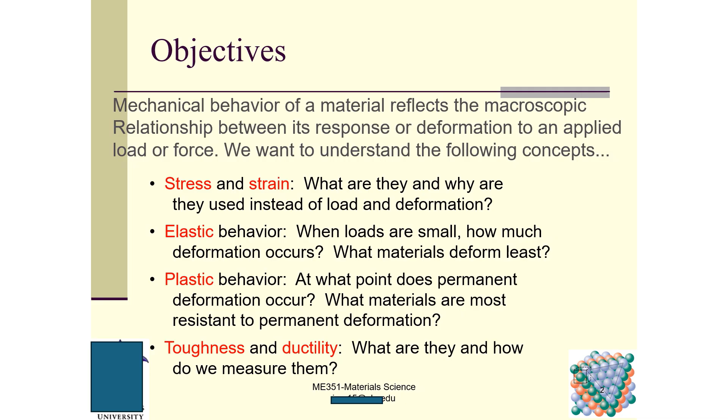So first we talk about elastic deformation. At the very beginning, here is a specimen. Initially we have this kind of atom arrangement, and with a small load, small stretch.

Suppose we have a tensile loading F. We stretch it. You can see the space between these rows, different rows, becomes larger. So this is a bond stretch - among these atoms there is a bond, and you can see the bond stretches.

And if you remove the load F, the specimen recovers its original size and original shape, and returns to the initial state.

Graphically we can use this diagram to show it. Here is delta, this is F. If you have F, you will have delta - loading condition is the cause, and F-delta is the result.

So if you have F, you have one delta, the displacement delta, and then after you remove this F, the deformation recovers, so the shape and size recover, and you get back the initial shape and size. This is called elastic. Elastic means reversible - if you remove the load after the deformation, the deformed specimen will recover its original shape and size. This is reversible.

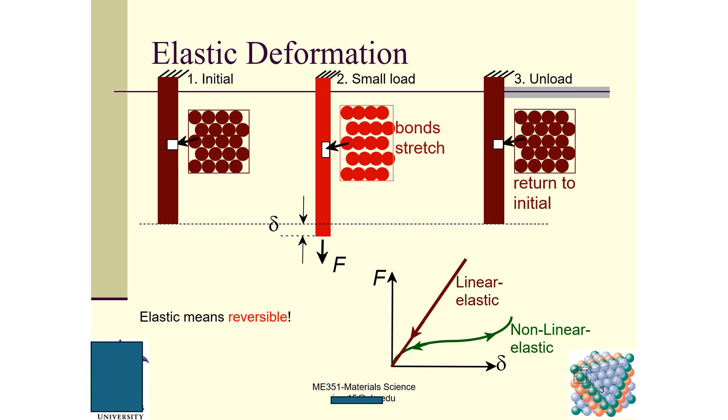Any questions so far? No question. Now we talk about plastic deformation, which is contrary to elastic deformation.

Initially we have this atomic arrangement, and with a small load, the bond stretch causes the planes to shear. This plane shear will generate plastic deformation, while bond stretch results in elastic deformation.

And then after we remove the load, the specimen comes back, but not fully. It can come partway back - here is the original length, but here is the final length. So this will be the plastic deformation.

If we compare this slide with the previous slide, we know that plastic deformation cannot be recovered. Plastic means permanent. Using this diagram to illustrate, you can see F versus delta, linear elastic goes here at the very beginning, and then there's hardening here, this curve.

At this point, you remove the load. After you remove the load, the specimen will go along this part. The slope of this straight line and the slope of that straight line are the same, right? They are the same, but we will not call it Young's modulus here, we will just say the slopes are the same.

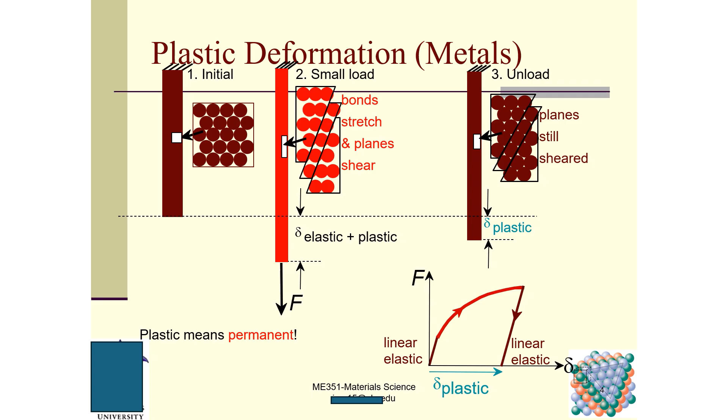Now we talk about a very important concept, engineering stress. This is an infinitesimally small cube. If we have FT here, and we know the area of this cross-section, we can define sigma as FT divided by A0.

This has the unit of pound force per square inch, or Newton per square meter. This is the English unit, and this is the international unit.

Keep in mind, this engineering stress uses A0, the original area before loading. I emphasize this because as we extend the specimen, the instantaneous cross-sectional area A keeps decreasing, and that will result in another stress concept called true stress, which we will talk about later. So A0 is the original area. This defines engineering stress, the normal stress sigma.

We can also have shear stress, using the same infinitesimally small cube, with cross-sectional area A0. If we have Fs, the shear force, dividing this shear force by A0 results in the shear stress tau. Sigma and tau have the same unit, either the English unit or the international unit.

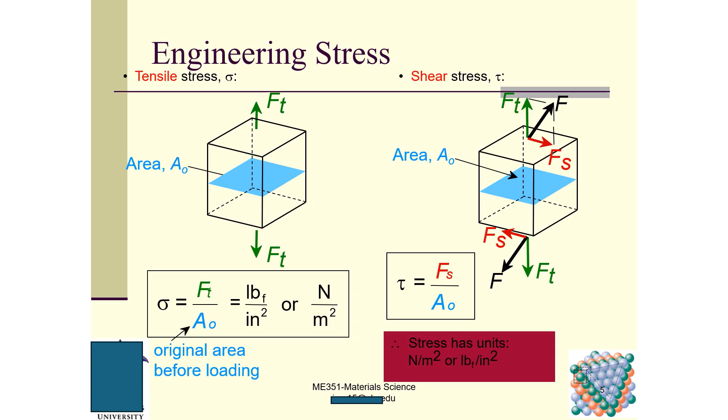Questions so far? No questions? Then we talk about the common states of stress.

Here is a ski lift, an example of simple tension in the cable. We have F at this end, and F at the left end. A0 is the cross-sectional area, and sigma equals F divided by A0. You can see we get stress based on force.

So this is tension. Torsional is a form of shear, for example this drive shaft. When this is rotating, the drive shaft experiences torsion. Here is the torsional moment M, and the diameter equals 2r, where r is the radius.

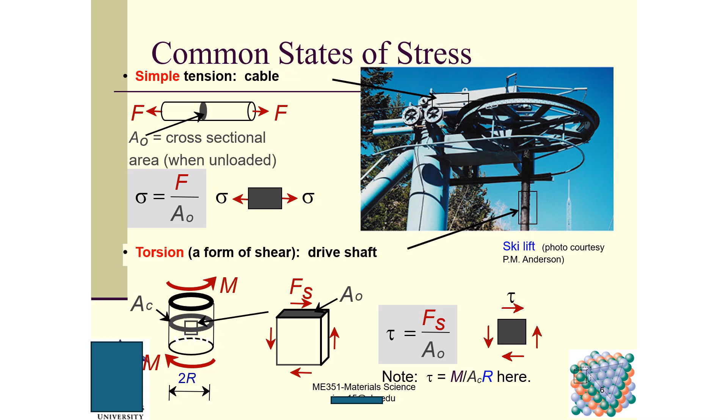This is AC here, and we have Fs shear force over A0, so tau is defined as Fs divided by A0. This tau is a shear stress. Sigma denotes the normal stress, which is perpendicular to the cross-sectional area, and tau denotes the shear stress, which is parallel to the cross-sectional area. You should be very clear about these two concepts.

Another common stress state: simple compression, like a boulder on top. Here A0 is the compression area, sigma equals F divided by A0. For this bridge, this supporting beam, we also have a loading condition of compressive loading. F divided by the cross-sectional area gives us compressive stress. Keep in mind, compressive stress is less than 0.

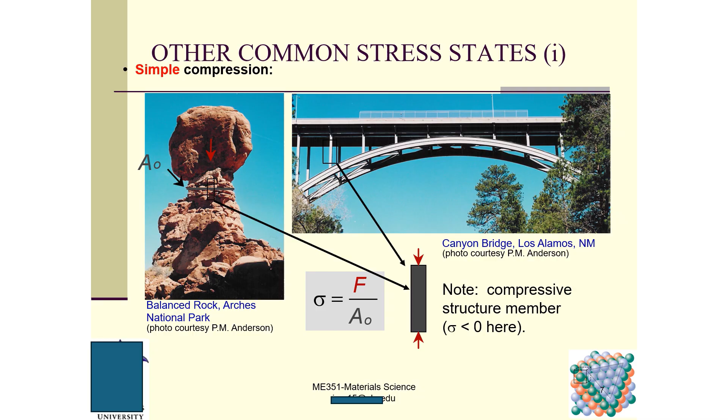And other common stress states. Here is a biaxial tension, which pressurizes the tank. We can see this is an infinitesimally small cube. We have this sigma along the theta direction, this along the z direction. So this is a biaxial tension. For example, this fish is swimming in the pond.

So this guy experiences the hydrostatic compression. Do you know what is hydrostatic stress? Hydrostatic stress is under the water, and all these stresses from different directions remain the same for this given generic point.

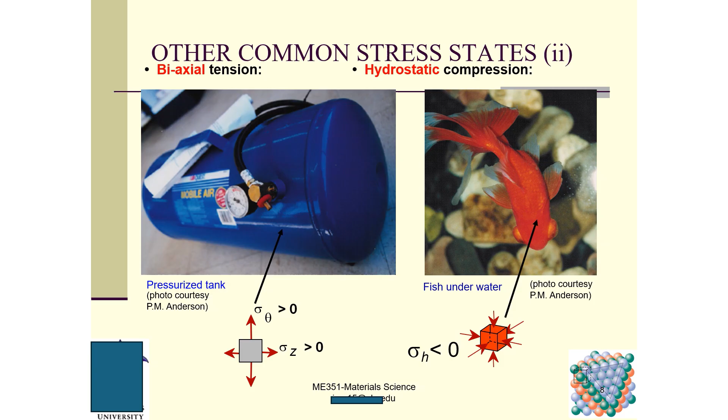Then we talk about engineering strain. This is another important concept in mechanics and in mechanical engineering discipline. Tensile strain equals the displacement divided by the original length. The shear strain is the shear angle gamma, and gamma equals this one plus this one. So this is gamma. We can write gamma using delta x divided by y. This equals tangent theta, if the theta value is very, very small.

Be very, very careful. I'm going to teach the computer-aided engineering course. In that course I will give you the detailed derivation of these strain components. But here, for material science, we focus on material properties based on the atomic arrangements of this material, so we will not focus on how we derive this shear strain and this tensile strain. If you want detailed information about these concepts, you can take another course, computer-aided engineering, in which I focus on the mechanics of elasticity. That will be a very useful course as well.

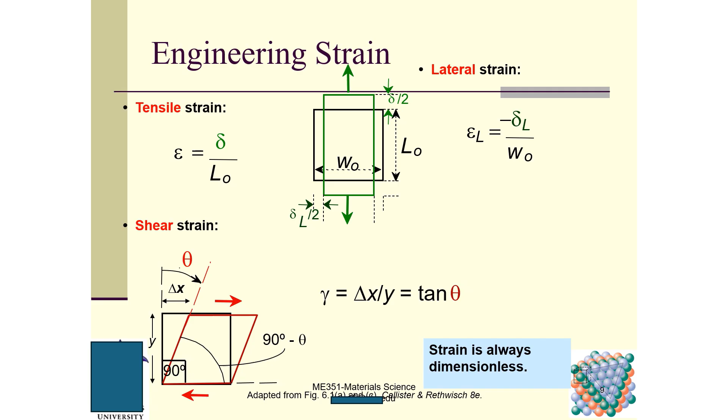One thing you need to keep in mind is that strain is always dimensionless. Strain does not have dimension, does not have unit. Tensile strain, shear strain, and lateral strain. Then we talk about the stress strain testing.

If you have taken mechanics of solids lab, you might have already finished the stress strain testing for 3 materials: cast iron, steel, along with aluminum. As you can see, for 3 different metals and how they break differently.

So here is a stress strain tensile machine. Here is the extensometer to measure the elongation of the specimen. This is the moving crosshead, and this load cell is used to calculate the force applied on the specimen. This is a typical tensile specimen. This end and this end are used for gripping purposes using the machine.

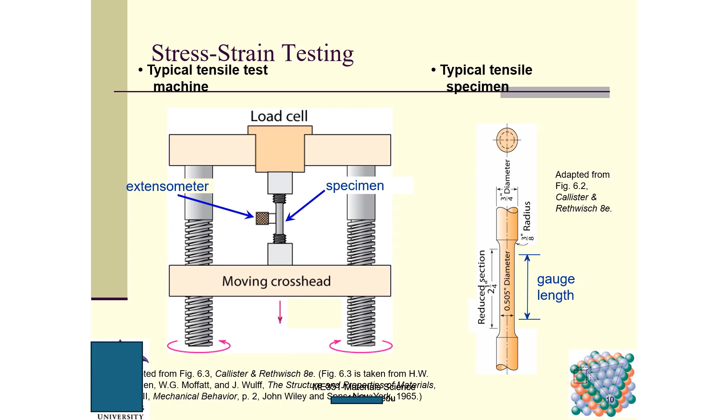Here's the gauge length, and we are going to measure the original length of this gauge length, and also use this extensometer to measure the elongation of this gauge length as the loading condition, as the load increases.

Then we talk about linear elastic properties. Modulus of elasticity, Young's modulus, and Hooke's law. This is sigma and E. The relationship of sigma and epsilon for linear elastic material can be written using this equation: sigma equals E times epsilon. This is the one-dimensional Hooke's law, which relates the stress to the strain, establishing the relationship between the stress and the strain.

This is a simple tensile test. So this is a square, this one is the original shape, and this one is the final shape. You can see if this specimen elongates in the vertical direction, in the horizontal direction this guy shrinks. So this you should need to know that.

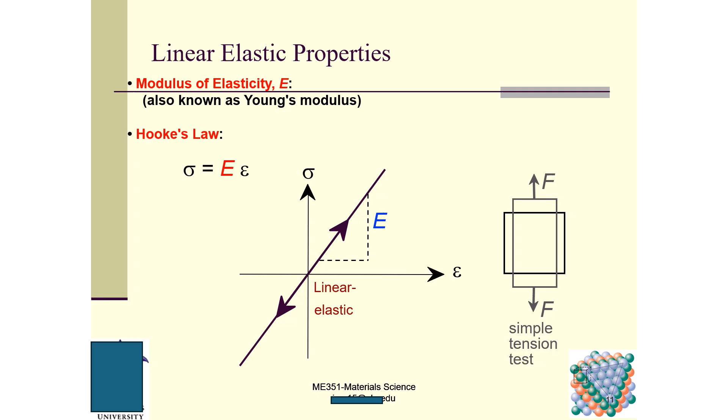So Poisson's ratio. This is Poisson's ratio, nu, defined as epsilon L divided by epsilon. So you have 2 directions, one is longitudinal, one is transverse.

So why do we put a minus sign here? Because based on the configuration I just introduced, if in one direction there's a tensile stress, the tensile loading, in one direction it elongates, and in another direction this specimen shrinks. So that's the reason we have a negative sign here.

For commonly used materials, metals, nu is about 0.33, ceramics about 1/4, polymers about 0.40. And units, nu is dimensionless. You should know that, because nu is a ratio of longitudinal strain and transverse strain. Young's modulus is in gigapascal or psi. Usually we use KSI.

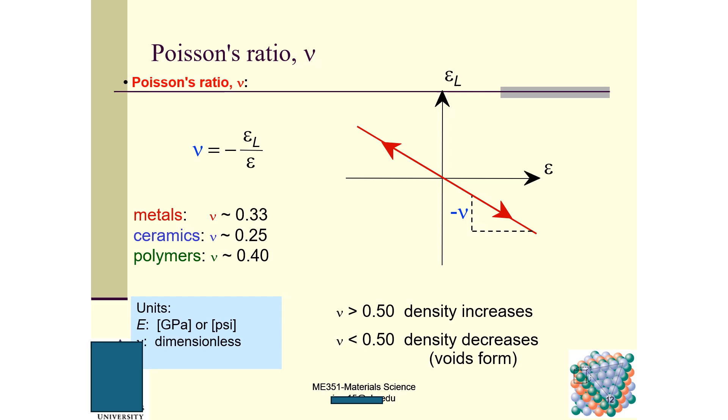You can see when nu is greater than 0.5, the density increases. When nu is less than 0.5, density decreases and voids form. This is for some special materials.

Then we talk about the mechanical properties. The slope of the stress-strain plot. Slope. This is the force. So this is a separation. Right? So this is weakly bonded. So this is strongly bonded. It depends on the bond strength of the metal. You can see this one has very high dF/dr, right? Very high. This one is lower because this has weaker bond strength.

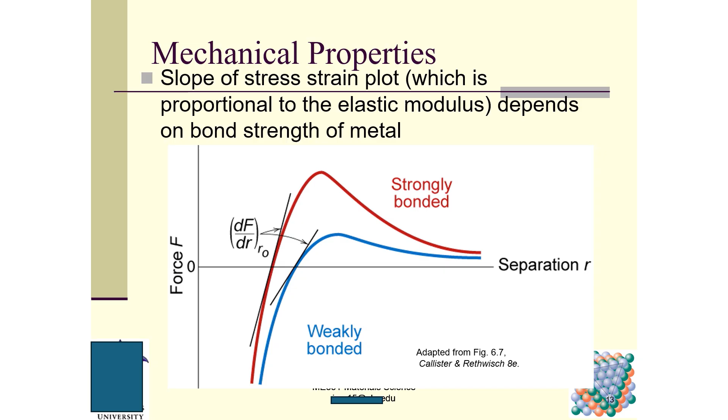Other elastic properties. The elastic shear modulus G relates the shear strain to the shear stress. Elastic bulk modulus K is related to volume. You can see here, okay, you have a pressure P, all in the same direction. If you compress it, the pressure changes the volume, and so P equals negative K multiplied by delta V, the change of the volume, divided by the original volume V0.

And there is a negative sign here also because of the pressure. Okay, so if the pressure is positive and delta V, this is the pressure here, this is delta V here, delta V over V0.

So, special relations for isotropic materials. Isotropic material means that for any given point, the mechanical properties are identical in all directions. So this is called an isotropic material. G and E are related using this equation. And the bulk modulus K and E are related using this equation.

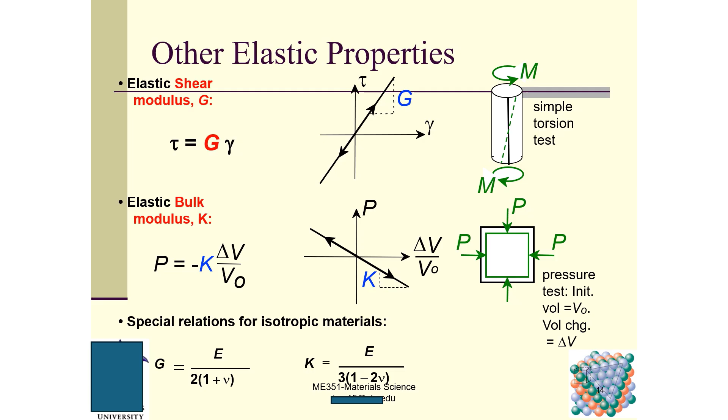Then we take a look at the comparison of Young's modulus for commonly used materials. This is in gigapascals. Okay, giga is very high. G means 10 to the power 9. Usually you can see metals and alloys have very high Young's modulus. Graphite, ceramics, and semiconductors have a wider range because graphite has a relatively low Young's modulus. However, diamond usually has a very high Young's modulus. Polymers are usually very low because polymers are very easy to deform. Composites and fibers have a very wide range because the mechanical properties of composites are dependent upon what the basic materials are and how they are combined together.

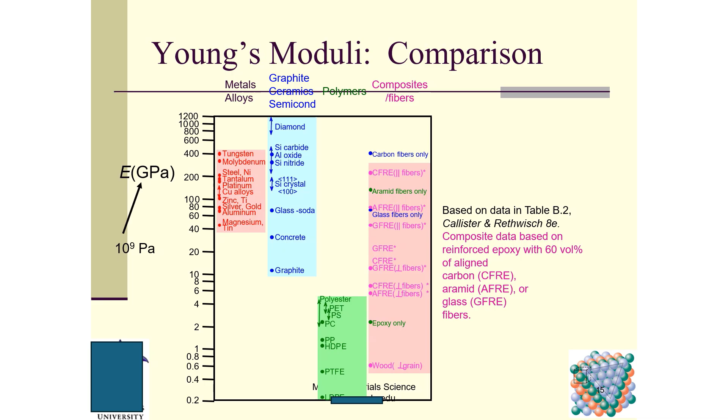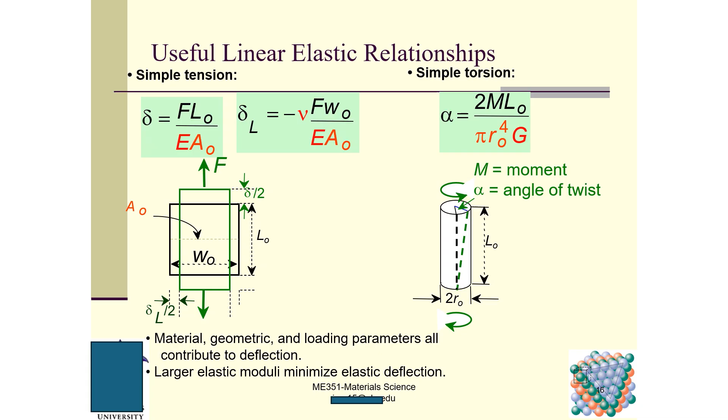Material, geometric, and loading parameters all contribute to deflection. A large elastic modulus minimizes elastic deflection. And we know that, right? A large Young's modulus means that it is difficult to bend, difficult to elongate or shrink.

And then we look at plastic deformation. You can see a simple tensile test. Engineering stress sigma, and engineering strain epsilon. We go this way, loading, and before yielding we can come back and recover the original shape and size. However, at this point, if we keep applying the load, increase the load, and we go here, then remove the load, the material will not recover along this original path. Instead, it will go along this new path. The slope of this straight line and the slope of this straight line are the same. So be very careful.

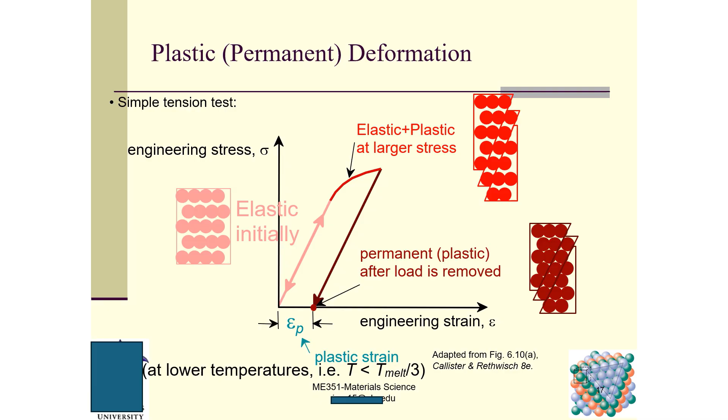The yield strength means that if the stress is bigger than the yield strength, the material is going to have plastic deformation. Look here: yield strength, yield tensile strength, yield strength, then engineering strain. Yield strength is a materials property.

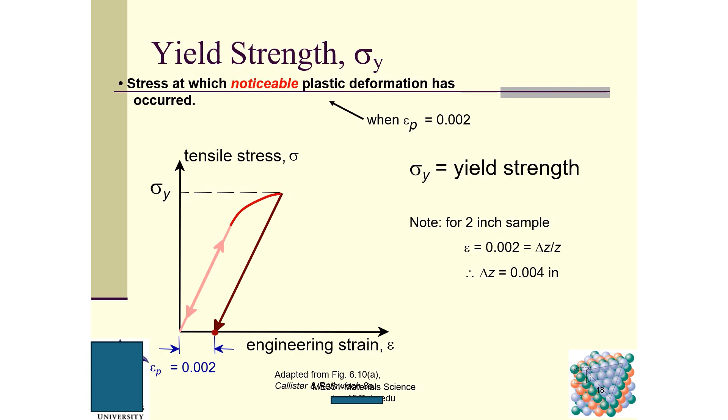Yield strength differs for different materials. We can see metal has a very wide range. Some materials are very easy to yield, some are very difficult to yield. It's also hard to measure for ceramics and semiconductors. Polymer is low. Composite is also hard to measure.

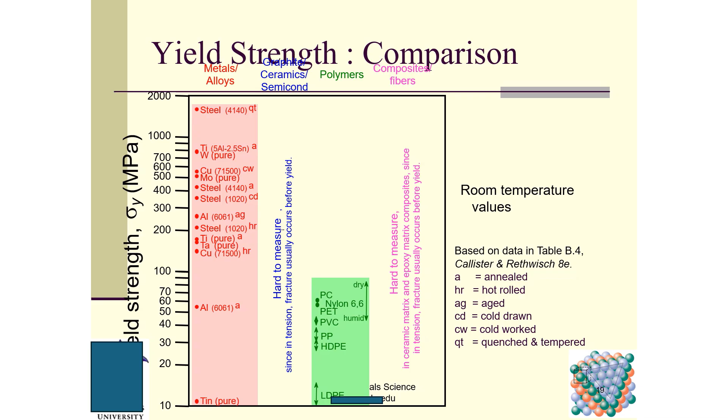Then we see VMSE. This tool is very useful. As I said, if you've bought the book and have access to this resource, using VMSE you can see the animation of how this specimen separates, how it breaks, and how you get this curve.

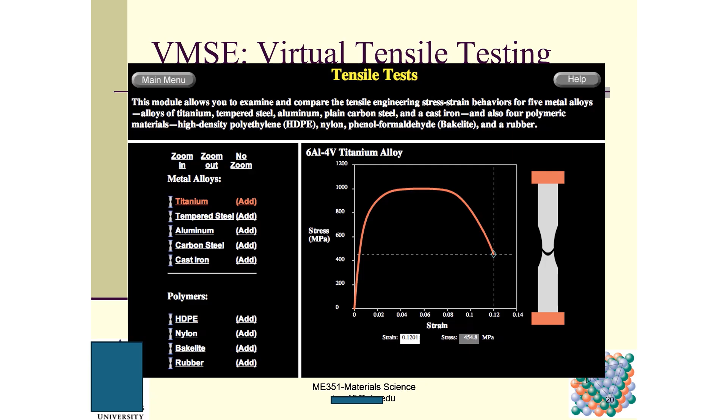Then we talk about tensile strength. There are two very similar words: one is stress, S-T-R-E-S-S, another is strength, S-T-R-E-N-G-T-H. Strength is the material parameter. Stress is the response of material, the stress level. You need to be very careful.

So this is a tensile testing curve. Engineering stress goes from 0 to here, the straight line, then to the tensile strength, which is the highest point. Sometimes we also call this ultimate strength. This is the highest point, then there is necking and then the break. For metals this occurs when noticeable necking starts. For polymers this occurs when the polymer backbone chains are aligned and about to break. So here is fracture or ultimate strength.

Ultimate strength, the fracture strength, is here, and usually people use this one as ultimate strength, but some authors use different terms, so be very careful. Some people use this highest point as ultimate strength.

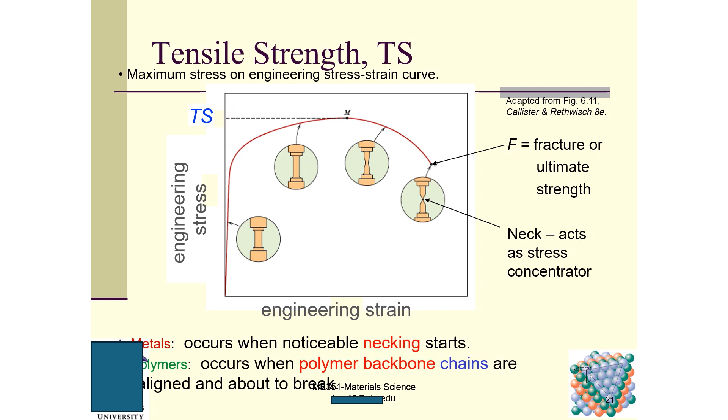Then we talk about tensile strength comparison for metals, alloys, ceramics, polymers, and composites. Composites have a very huge, wide range because, as I said, composites are very complicated, and their properties depend on what materials you are using and how they are arranged and combined together.

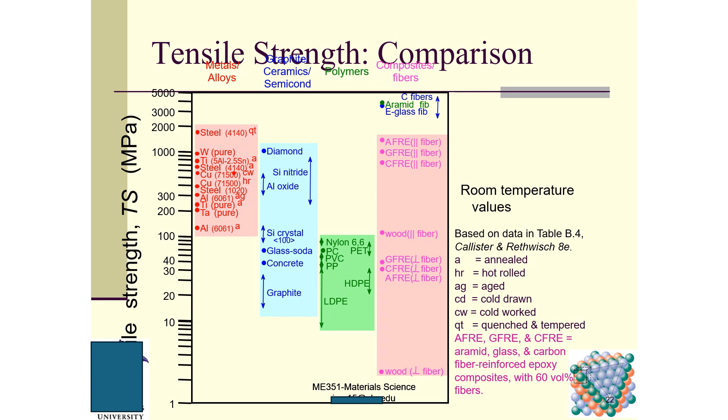Ductility: plastic strength, strain, and failure - the plastic tensile strain at failure. Here, engineering tensile stress is the ordinate, engineering tensile strain is the abscissa. This is L0, the original length, and LF is the length at which it breaks. Ductility can be quantified using this equation: LF minus L0, divided by L0, multiplied by 100.

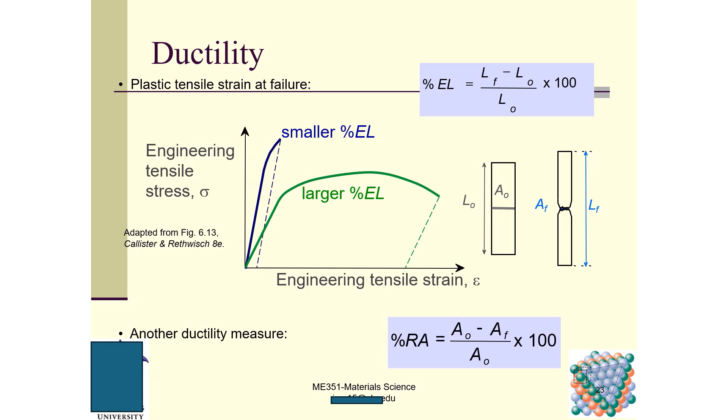Another ductility measurement uses the change of cross-sectional area: the original cross-sectional area A0 and the final fracture cross-sectional area, with the difference between these two divided by A0, then multiplied by 100. This is another way to quantify ductility.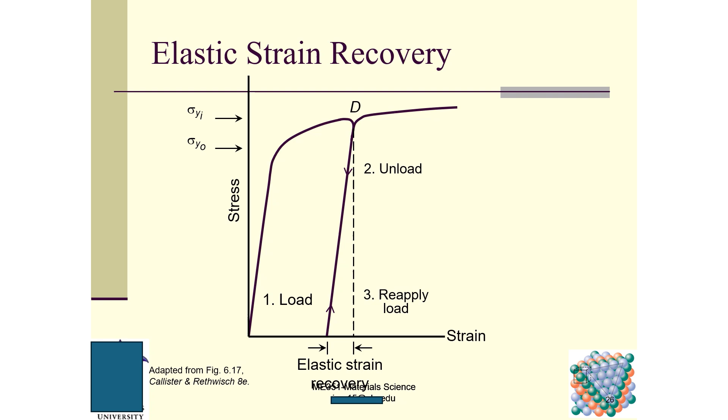And then we talk about hardness. Hardness is used to measure how difficult it is to indent the material. There are several different hardness measurement systems.

One is called Rockwell. In our mechanical engineering lab, I teach students how to do hardness testing using the Rockwell hardness tester. We have 3 scales, and we use HRC. If you have taken mechanical engineering lab, you might have heard of HRC. HRC means H is hardness, R is Rockwell, and C is the C scale. C scale means the major load is 150 kilograms.

So for A scale, we use a diamond. For B scale, we use a 1/16 inch ball, and for C we use a diamond. But here is the major load.

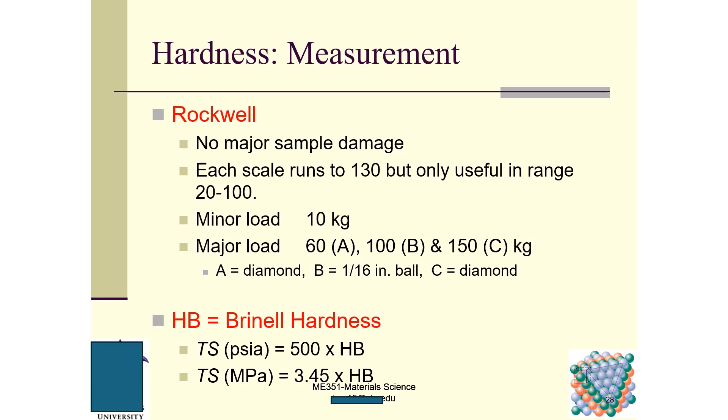HB is the second commonly used hardness measurement system, called Brinell hardness. Brinell hardness relates to tensile strength - tensile PSI, tensile strength MPa, MPascal. This is the international unit, and this is the international English unit. We have an approximate relationship between TS and HB. For this unit system we have 500 as a factor, and for the international unit system we have 3.45 as a factor.

The baseline is that we have 4 different hardness measurement systems: Rockwell, Brinell, Vickers, and the fourth one is Knoop. So the third one and fourth one are used for micro hardness. Any questions?

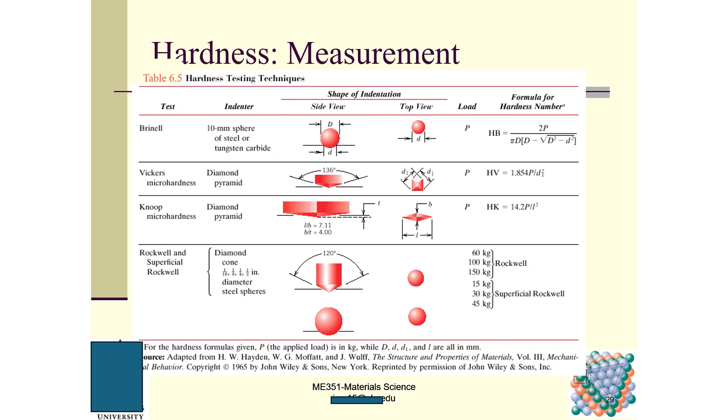No question? So, hardness observations. Hardness is a measure of a material's resistance to localized plastic deformation. We have an indenter here - we just apply the indenter to see how easy it is, and to measure the resistance.

So the 2 most commonly used hardness testing techniques are Rockwell and Brinell. Several scales are available for the Rockwell test - A, B, C. If you are going to take a mechanical engineering lab, you will learn how to use this hardness testing machine. For the Brinell test, there is a single scale.

One thing I want to mention is that we also often hear about pencils having different HB numbers - that is Brinell hardness, right?

Brinell hardness is determined from indentation size. The Rockwell test is based on the difference in indentation depth from the imposition of minor and major loads. So these two hardness measuring systems are performed based on different principles.

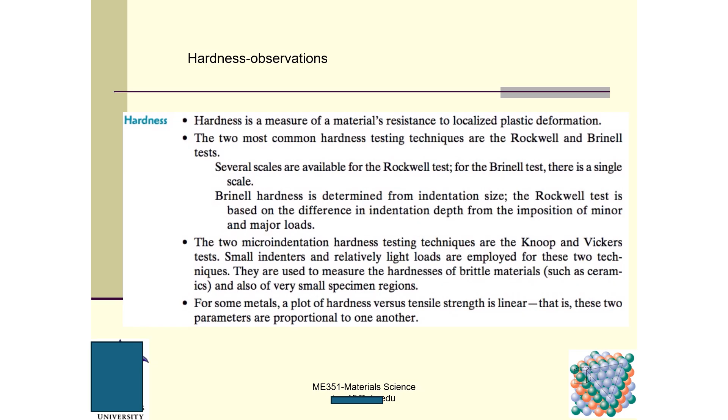The true stress and the strain. We talk about engineering stress and engineering strain, and then we talk about the true stress and true strain, and how they are different from their engineering counterparts.

True stress equals F divided by Ai, where Ai is the instantaneous cross-sectional area of the specimen, because when you do the tensile test, the specimen's cross-sectional area is changing, it's decreasing. So here it's called true stress, and true stress keeps increasing.

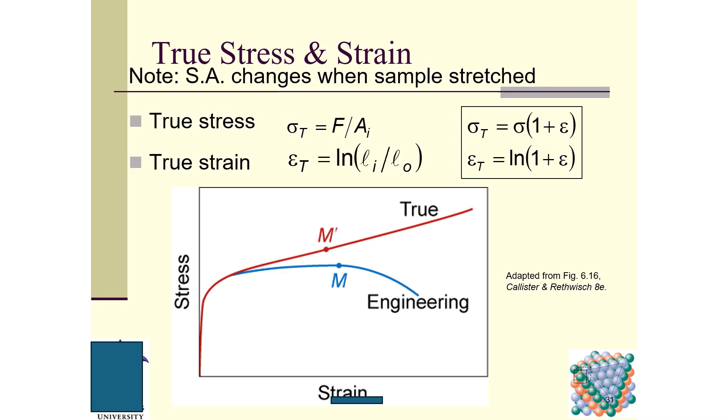The true strain is the log of the ratio between Li, the instantaneous length of the specimen, divided by the original length L0. True stress and true strain can be related to engineering stress and engineering strain using these two equations.

Hardening is the increase in yield strength due to plastic deformation. Here is one material with large deformation. Here is a small hardening, and here is a large hardening. And curve fit to the stress strain.

This is the response: sigma t, the true stress, equals k times epsilon t to the n, where n is the hardening exponent. n equals 0.15 for some steels, while n equals 0.5 for some coppers. This is the true strain.

This equation is very, very similar to the equation for creep testing, right? But that one is for the increment of sigma over the increment of epsilon, while here it's just sigma and epsilon.

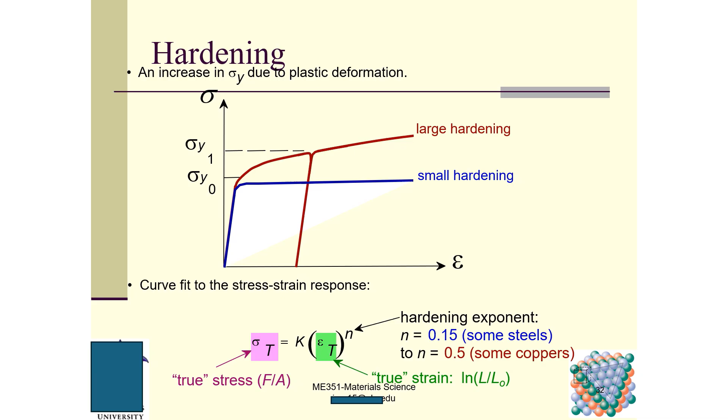Variability in material parameter properties. We know that for the same set, the same bunch of the same purchase of materials, even though they have nominally the same mechanical properties, when we measure their mechanical properties, they are actually different from one another.

Elastic modulus is a material property. Critical properties depend largely on sample flaws, defects, etc. There's large sample to sample variability, so we use a statistical tool to quantify the mechanical properties.

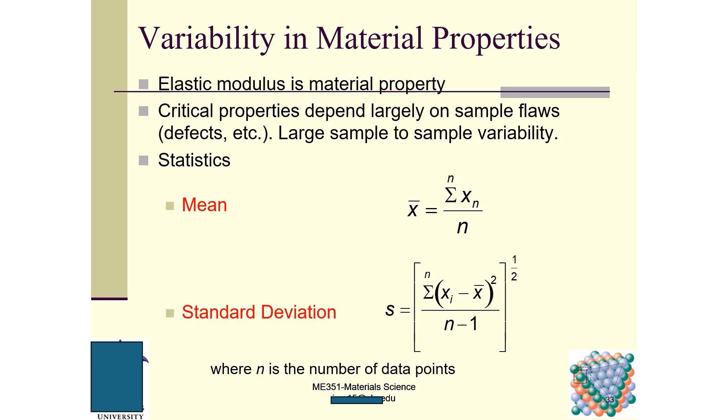First, mean value, okay? Then standard deviation. We will know the mean value and standard deviation.

Then we talk about design safety factor. We have heard this one before. So here is the design safety factor: sigma working equals sigma y, the yield strength, divided by n. We use a safety factor that needs to be greater than 1. That's why we call it a safety factor, because we do not want n to be 1.

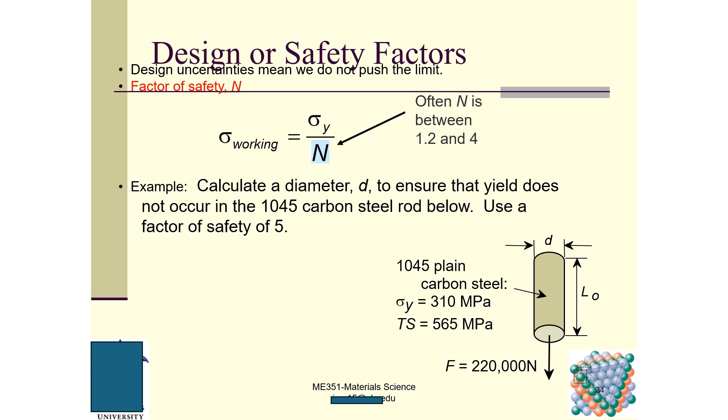That means physically, we don't want the operating stress to be exactly the same as sigma y. In that case, it's very, very dangerous. Suppose we use a safety factor of 5, that means we are very, very conservative. We can calculate sigma working.

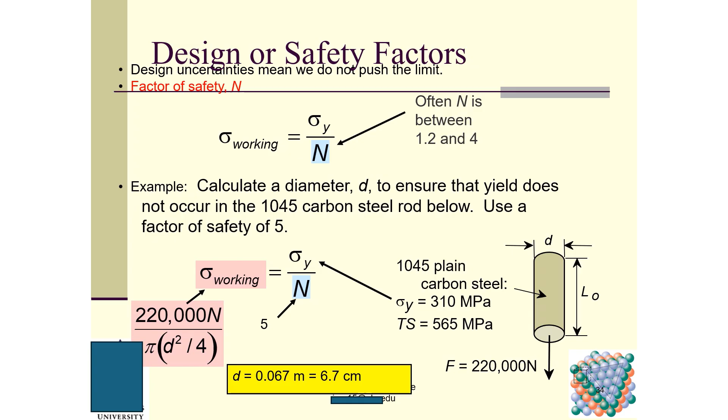So, summary: in today's class we talked about stress and strain, and these are size-independent measures of load and displacement, respectively.

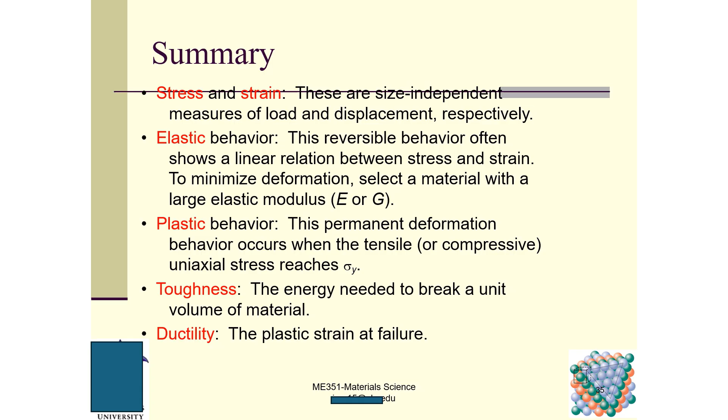Elastic behavior means that after you remove the load, the mechanical specimen can recover its original size and shape. Plastic behavior means that after you remove the load, some deformation cannot be recovered. Toughness is the energy needed to break a unit volume of material. Ductility is the plastic strain at failure.